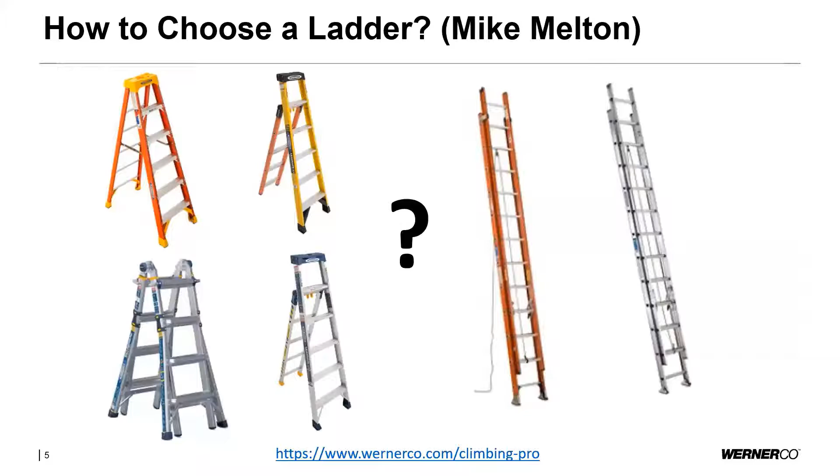Just to go over the previous discussions that were had over the past 3 weeks: the first one was How to Choose a Ladder by Mike Melton on the Werner team. He went over some great information on which products to choose when it comes to your choice: extension, step ladder, lean-safes, or multi-use ladders. Next after that, we had Milt DeAsis present ladder inspection and setup. This also went over how to properly choose a ladder for the job you're doing and how to inspect that specific ladder, whether it's a step ladder, extension ladder, or any other style ladder that was discussed.

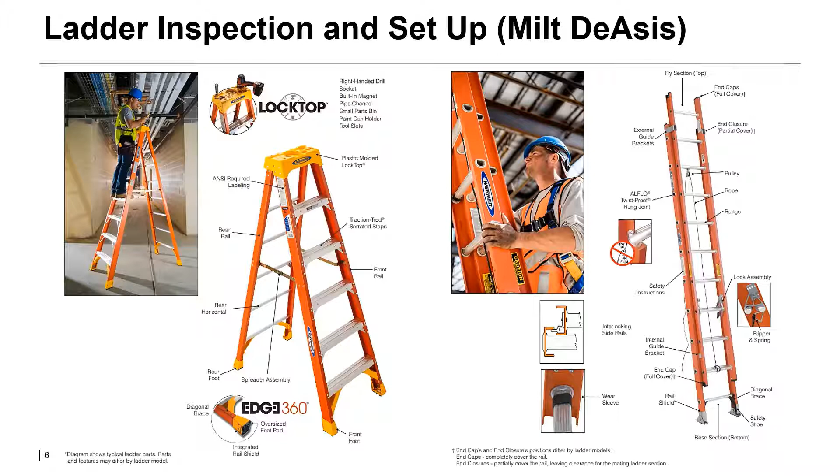And lastly, just last week we had Chad Lingerfelt discuss safety while climbing. What you'll notice during this presentation is some information, if you attended last week's, will overlap a little bit, as we do have some similar topics.

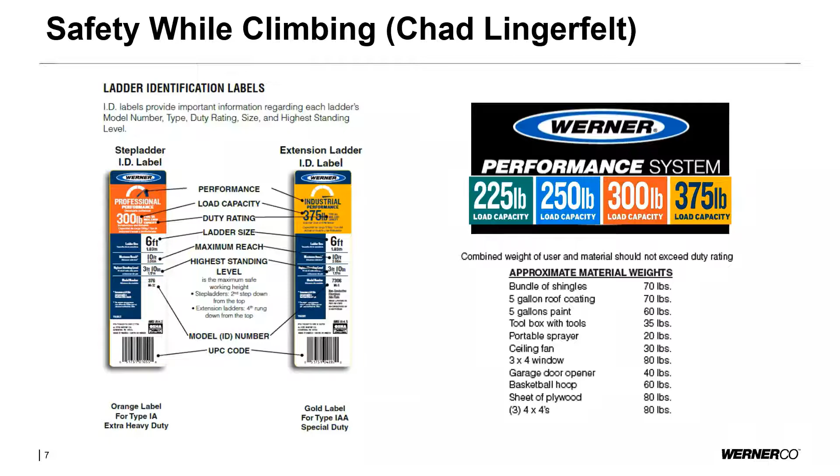But with that, we'll get going on safety at the top. So the first ladders we're going to discuss are step ladders. Different sizes of step ladders are going to be discussed, and all the rules that we're going to talk about, the do's and do nots, are going to apply regardless of the size. As you can see on this slide, there are different colors, and those colors depict certain weight ratings and whatnot. So when you heard Mike Melton talk a few weeks ago about how to properly choose your ladder, that weight topic would have come up.

At the top, the do's. When you're using your step ladder, you always want to face the ladder when climbing. This is going to help you be stable while climbing, and also you want to maintain those 3 points of contact — as you're climbing, one leg will come off the ladder rungs, and you can use your 2 hands and your other foot to maintain that 3 point of contact. You always want to stay in the middle. Have your belt buckle stay in between the rails of the ladder, and that will allow you to be stabilized, so the ladder won't swing side to side, overreach, or anything like that.

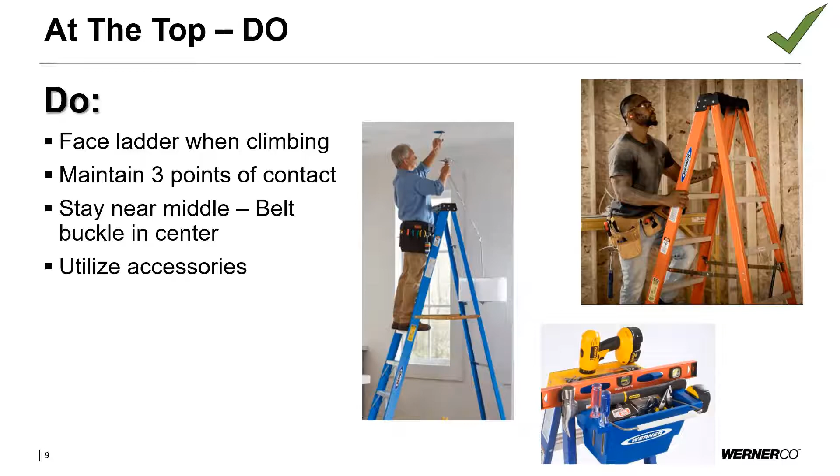You never want to face the ladder backwards — continue facing the ladder as you're ascending and descending, down to ground level or to access the top. So you always want to be facing the ladder itself. And you do not want to lean a step ladder. The only way you'll be able to lean it is on our next topic when we talk about leaning ladders. A step ladder is not made to lean, it's made to be an A-frame ladder — open it up, put the spreaders all the way out, and that gives you the stabilization of that step ladder. So you want to follow the manufacturer's recommendations on the ladders you're using.

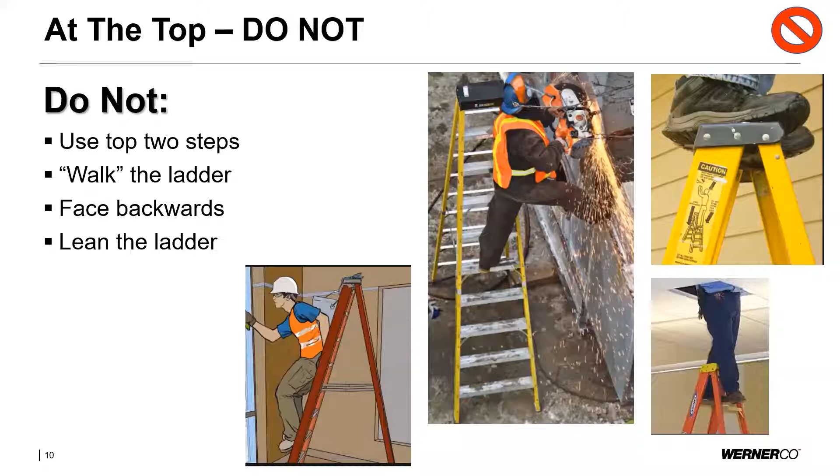Next up, we talk about leaning ladders. What I'm going to do here is click and use my pointer. So now we have our leaning ladder.

You want to adopt the same rules for step ladders with a couple other things to keep in mind. You'll notice the color coding on the back is different. You can see the yellow on the back rails, saying that this is a lean-safe ladder. That will give your safety directors or an OSHA inspector notice that this ladder is able to be used in that application.

A couple things to keep in mind when using the leaning ladder while adopting the typical stepladder rules as well. This has a cutout at the top here, so you can lean this on a corner or a stud, and that will keep you safely centered on whatever you're working on. A couple other things at the top here: a magnet, a place for your nuts and bolts, to bring your tools up and whatever fasteners you might be using, allowing you to utilize the top piece of this ladder to your advantage.

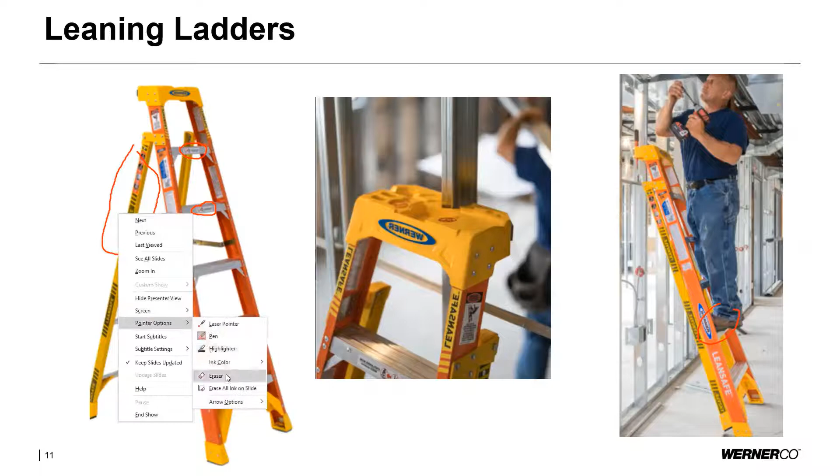You'll notice there's a toe board here, just in case you drop anything that lands on the podium you're standing on. These can get pretty tall, so if people are working underneath or beside you, you don't want to kick that off. From a Werner standpoint, this is actually going to be on 3 sides and not just a toe board—it will go around 3 sides of that podium.

You're allowed to keep your feet flat on the surface, and that helps you eliminate fatigue and allows you to work for a longer period of time and be comfortable directly overhead or directly in front of you. It's really going to give you that good sense of security, and fatigue is not going to set in as quickly.

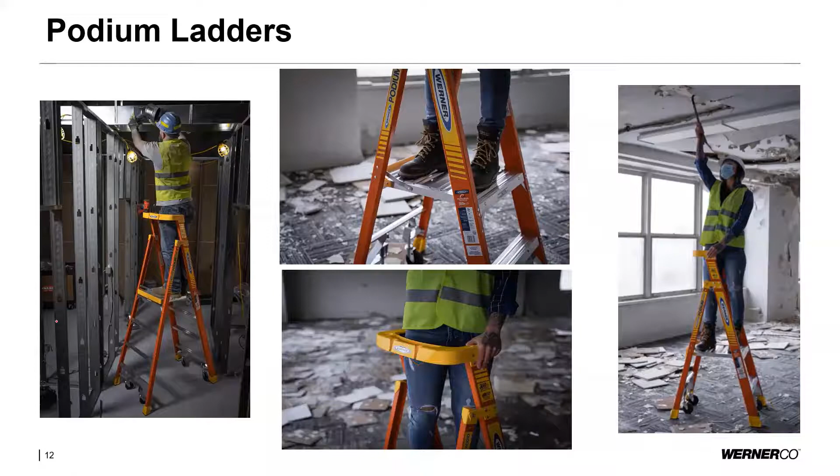Okay, we had another question. So if you are working on a standard step ladder, opened up all the way, and you are not on the top 2 steps, can you use 2 hands to do work? What about the 3 points of contact? You can use both hands—your feet, your knees, and your waist would be against the top, so those would be your 3 points of contact. You would still want to make sure you do not overreach.

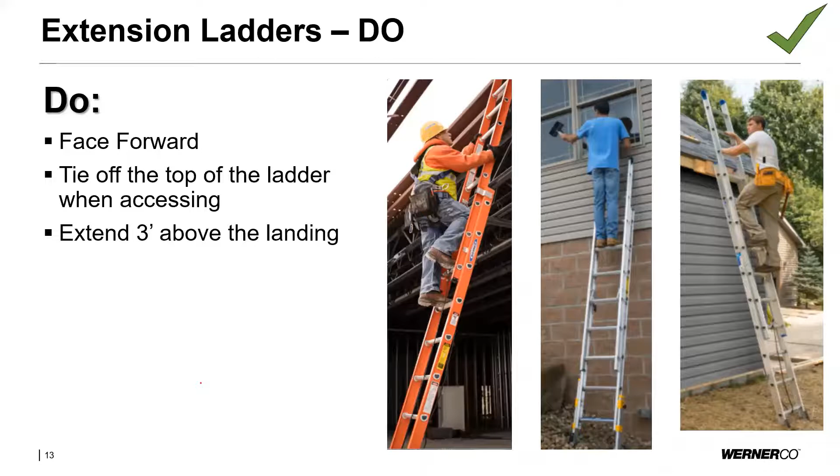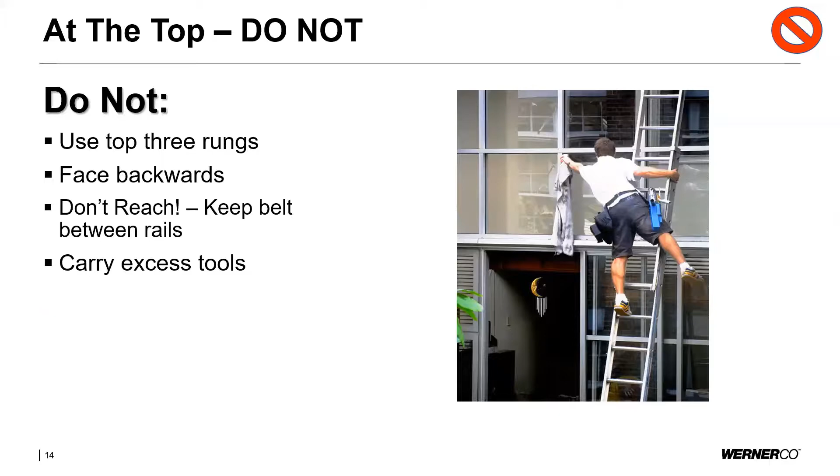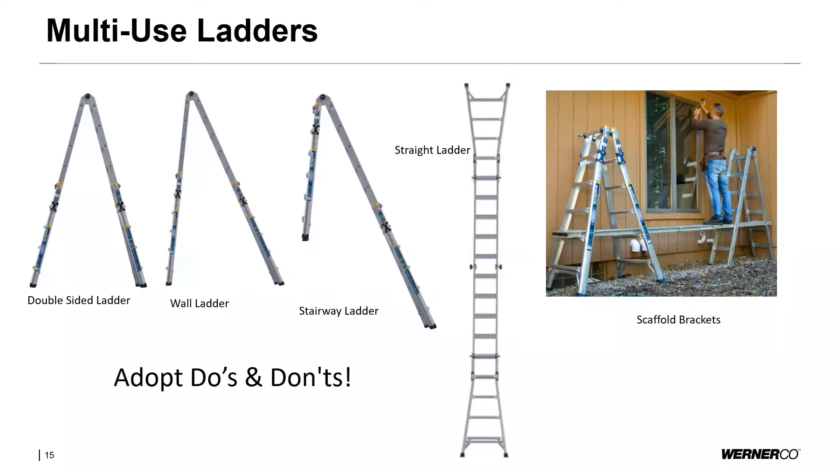So in summary, always choose the type of ladder based on your environment and your surroundings. Choose the ladder height based on where you need to reach. Remember the rules of how high you can safely climb based on the extension ladder, step ladder, lean-safe ladder, or multi-use ladder, and remember where you can step at the top based on what ladder you're using.

For instance, when a lean-safe ladder is being used as a step ladder and then switched into leaning mode, those things change. So just be conscious of that with the type of ladder you're using.

Know your limitations on the different styles of ladders, and lastly, ask somebody for training. If you're a safety director or safety manager, provide that training. You have people like Werner that are able to come out to your job sites and give you that type of training, and we can always point you to our website, which has free online training as well.